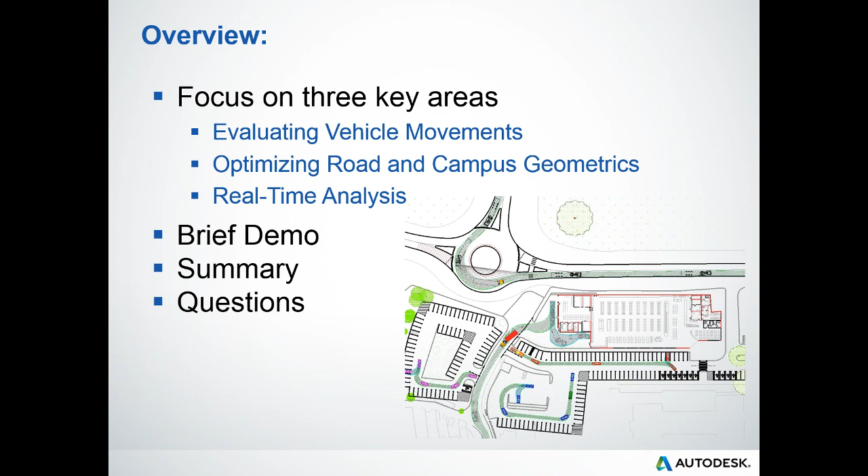My goals for our session: I want to give you some exposure to the Autodesk Vehicle Tracking Solution, as well as review a subset of its capabilities. I say subset because it would take much longer than our 30 minutes to review all of its functionality. Instead, we will focus on several primary features, and we will do it through the lens of its business benefit. In other words, how specifically does Autodesk Vehicle Tracking improve the planning and design process? Finally, I want to ensure that we address any questions you have about our solution. So with that, let's go ahead and get started.

We begin with a project where, like most projects, we need to evaluate if our geometrics can support a service vehicle. In this case, it's a standard school bus. Essentially, we need to confirm if a school bus can successfully maneuver from the southwest through our project, exiting at the northeast. Using Autodesk Vehicle Tracking, we can determine this very quickly.

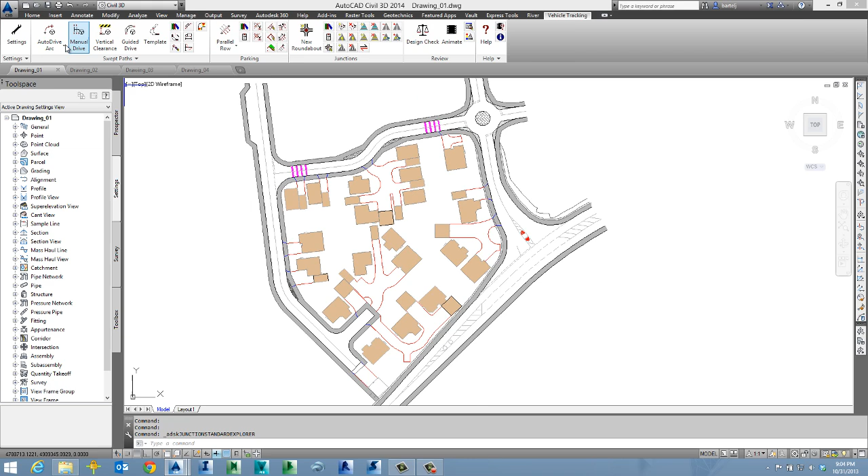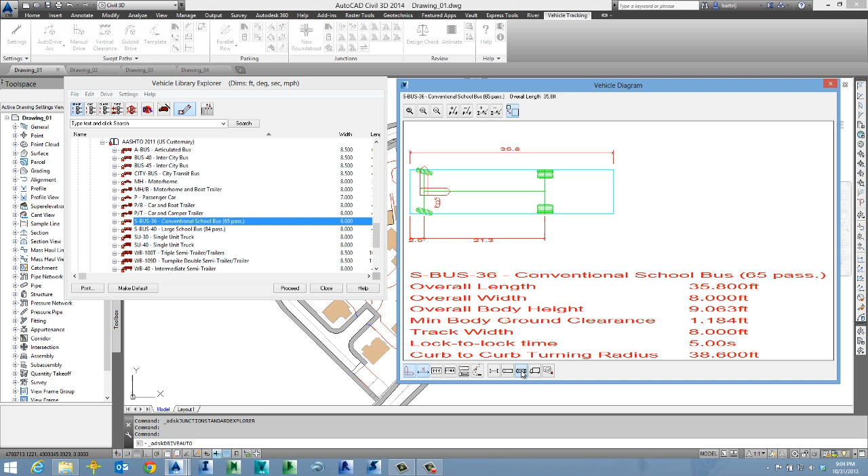First, we will start by selecting Auto Drive and then choosing the appropriate design vehicle. As we do this, I would like to point out the extensive vehicle library that ships with the solution. It contains design vehicle definitions and types from across the globe, numbering well over 1,000 vehicles. For our project, I will select the standard 65-passenger school bus from the U.S. AASHTO Design Library. Once selected, we can use the vehicle diagram to see specific information about the selected vehicle, including dimensions, as well as a chassis view and profile view.

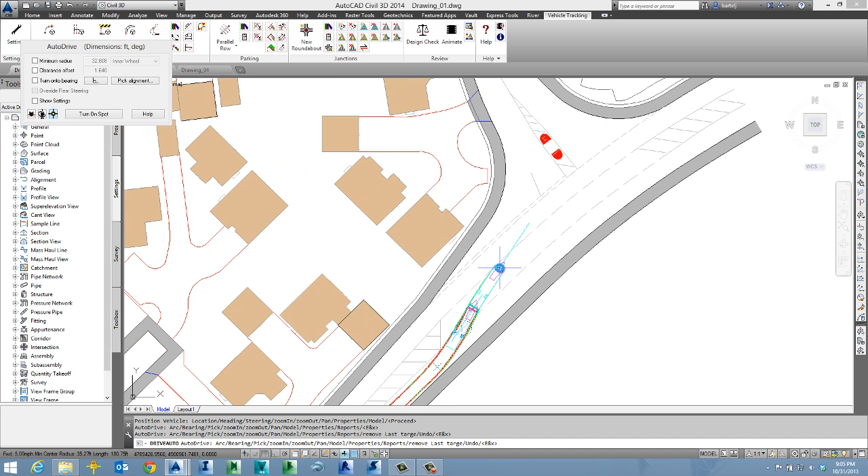From there, we will proceed by simply clicking points within our project roadway and literally drive the route we would like to evaluate. As we pick points, you will notice a green and red envelope being constructed. The green outline indicates the envelope created by the vehicle body, and the red outline indicates the envelope created by the chassis. Using this outline, we get immediate feedback as to the horizontal space required to maneuver our vehicle. As we enter the roundabout, maneuvering is a little more challenging, so I'll pick my points a little closer together.

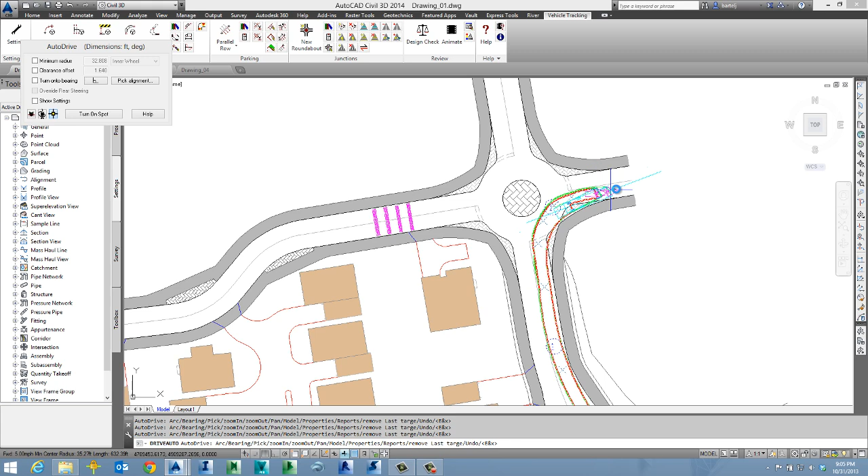When finished, a number of intelligent grips are displayed. Using these grips, we can easily edit or refine our vehicle path. As we make changes, the results are dynamically displayed. And if we make an adjustment that results in a maneuver that our vehicle can't physically do, we get immediate feedback in that the envelopes terminate at that point.

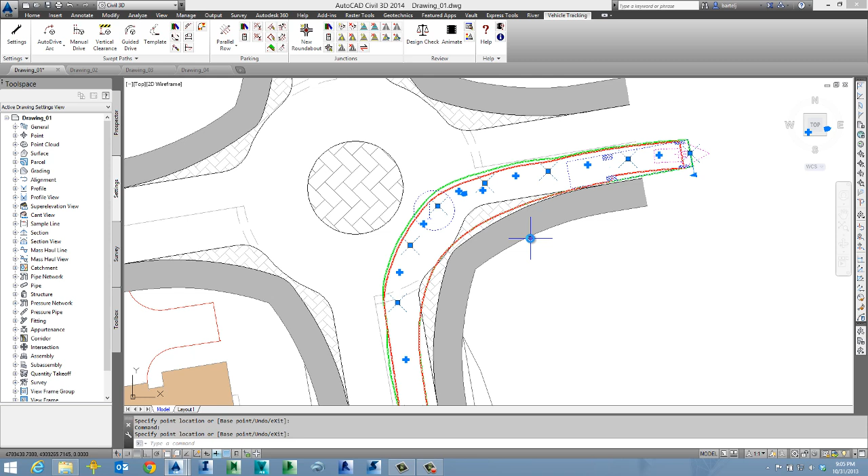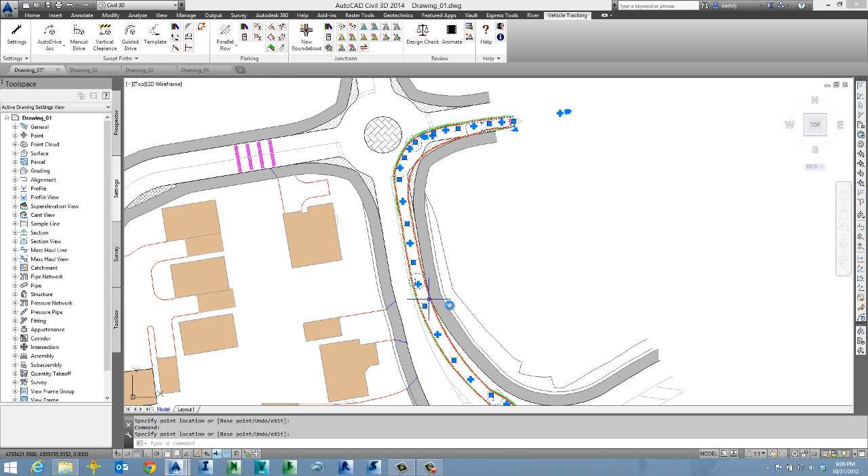Now for our project, the resulting swept path analysis shows that a bus can make the corner so long as the brick area is a surface designed to be driven over. To complete this process, we would go back and review the entire path and make any revisions as necessary. By using the intelligent grips, these revisions could involve adjusting or creating target points. With our swept path analysis complete, we have confirmed that it works horizontally, but there's more that should be considered.

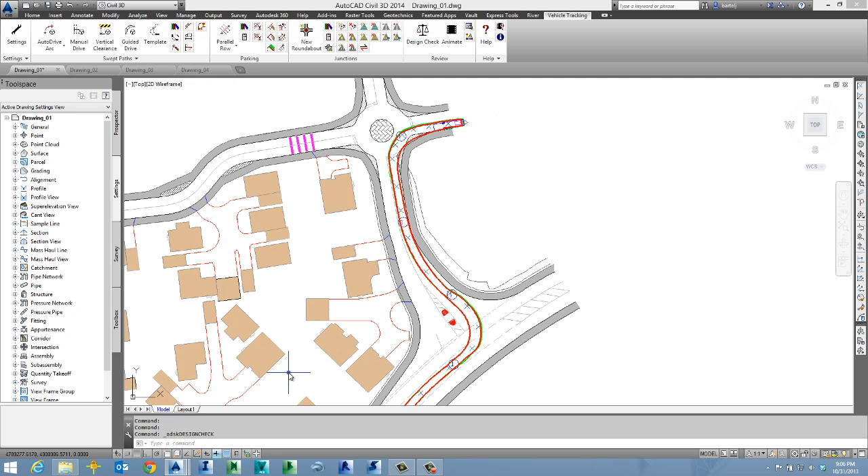By performing a design check, we can evaluate our vehicle path against a number of rules-based constraints. In our case, the results show that we have a severe steering warning, which indicates that our maneuver requires a steering angle that's in excess of what is permissible. For further detail regarding steering, we can easily create a graph within our model.

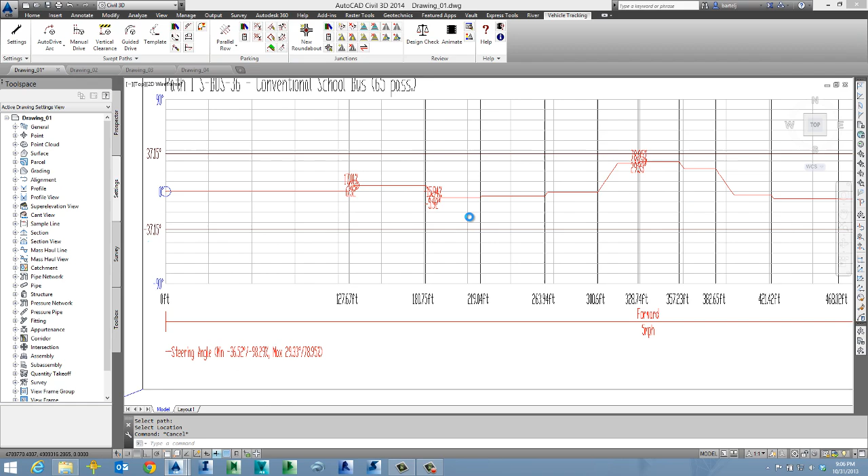Once created, Autodesk Vehicle Tracking displays steering limits as well as the steering angle throughout our swept path analysis. Looking here to the right, we can see the area where we exceed what is currently permissible, and that coincides with our maneuver through the roundabout.

Using Autodesk Vehicle Tracking, we are able to quickly and easily determine if our design can accommodate vehicle movement, as well as confirm if that movement complies with rules-based constraints.

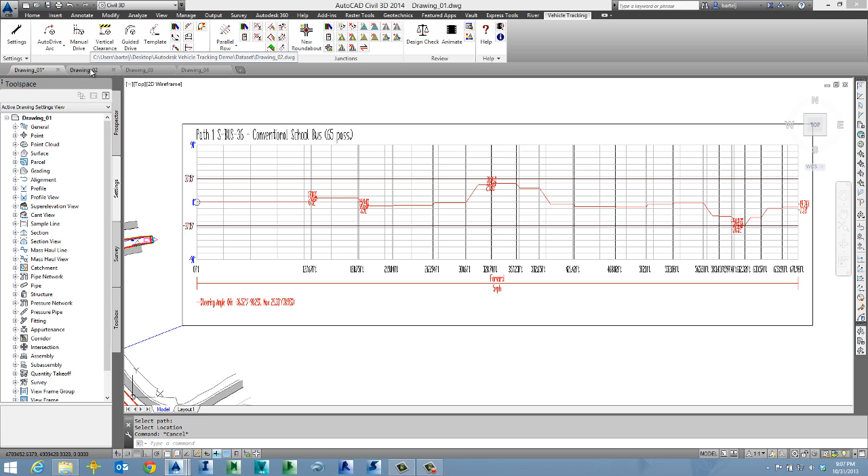Now, because vehicle movement will also involve negotiating a site, let's take a look at another example. In this situation, we want to confirm that our design is such that a 30-foot rigid delivery truck can successfully access the loading area of this commercial facility.

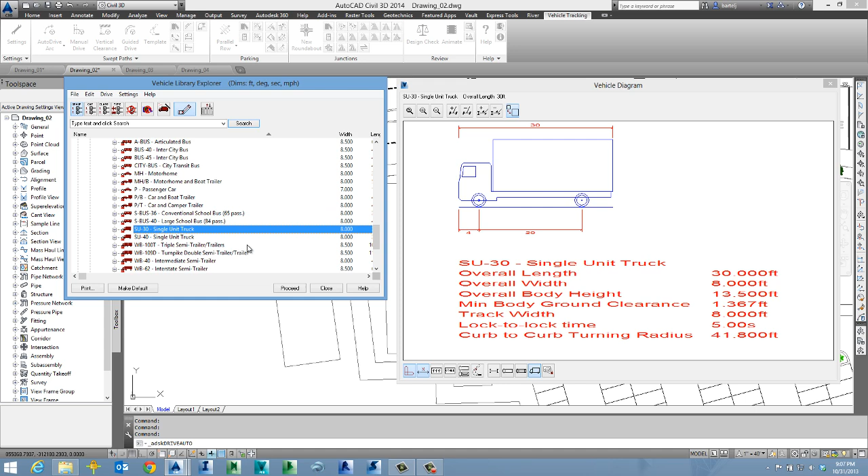Like our last example, we will begin by selecting Auto Drive and then choosing the SU30 design vehicle. However, this time, rather than picking each target point to drive through within our design, we'll let the system compute some of the path for us.

We can accomplish this by starting our swept path and then choosing an alignment to control our turns. The first alignment entity we choose will be the entrance centerline stripe. We will then select the edge of pavement parallel to the building, and we will finish by choosing the pavement edge near the loading bay.

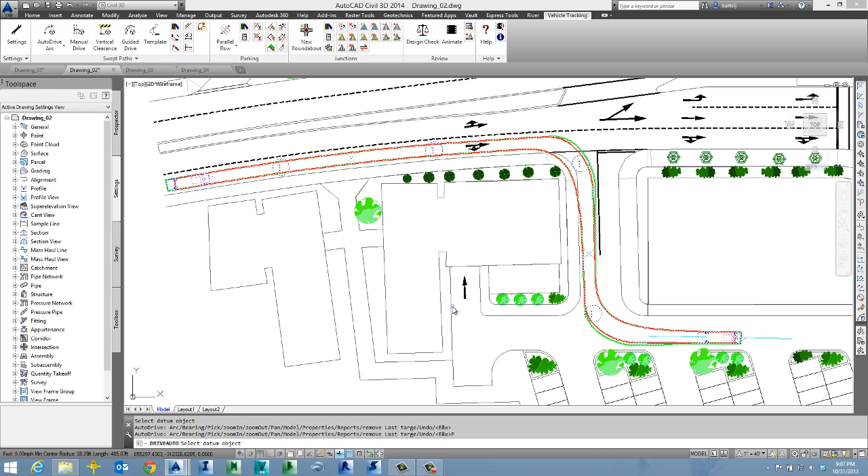In literally 4 clicks, we were able to accurately complete our analysis.

Like our prior example, we can now use intelligent grips to refine our swept path analysis if necessary. Within the parking area we seem to be okay, but if we check the drive entrance, we see that the tires of our truck will leave the roadway.

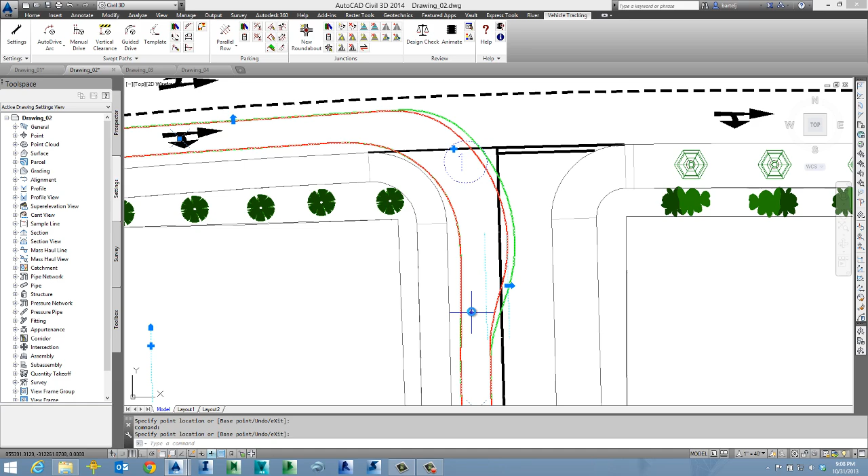Now in the real world, a driver could resolve this by performing a steering overrun, and by clicking the arrow grip, we can simulate this maneuver. When complete, our conflict is resolved.

As I back up, our swept path provides an excellent exhibit to convey the vehicle movement to a stakeholder. Having said this, many times a 2D representation is hard for folks to visualize.

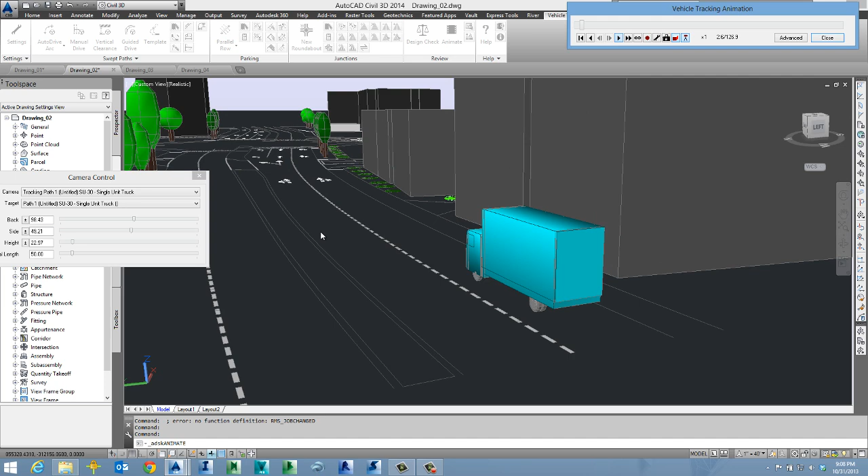To make our presentation more lifelike, we can quickly create an animation. Once created, simple VCR-style buttons allow us to experience our vehicle movements in 3D.

While the animation plays back, we can adjust one of several slider bars to control our proximity to the vehicle as well as our point of view.

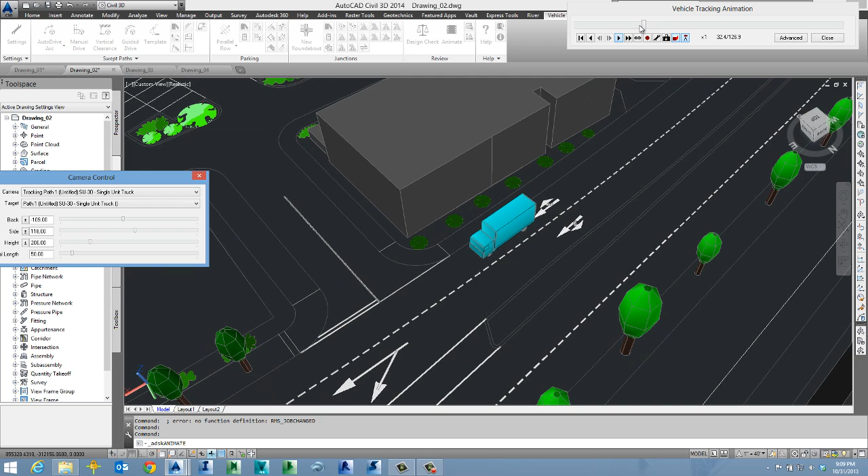As our SU30 rigid delivery truck turns and enters the drive, we can easily see the effects of the overturn maneuver we assigned in our swept path analysis.

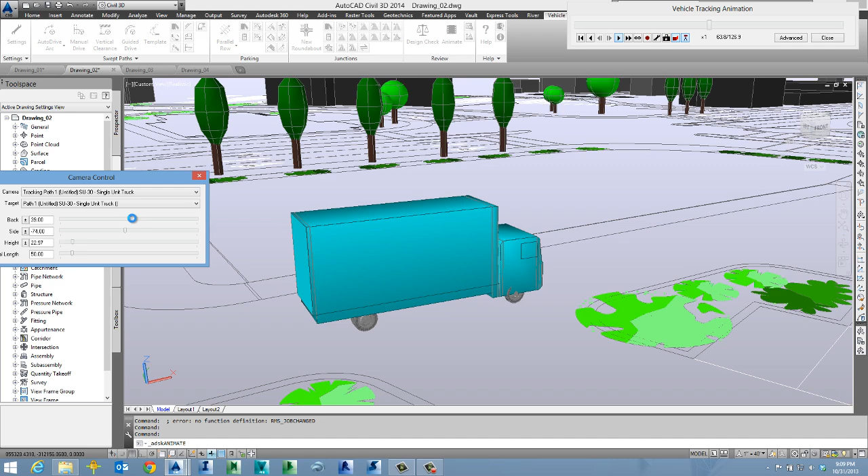With a single click, we can adjust our display to that of the driver's view, and then back to a fixed position camera. The visualization tools within Autodesk Vehicle Tracking provide a means to analyze and present our vehicle maneuvers from any vantage point our project requires, even if that includes the driver's side mirrors.

Using the side mirror viewing option, we can experience exactly what the driver will as they reverse into the facility's loading bay.

Whether it's a 3D visualization or a 2D exhibit, Autodesk Vehicle Tracking provides the tools necessary to create both very quickly, giving you the flexibility to leverage whichever best meets your project needs.

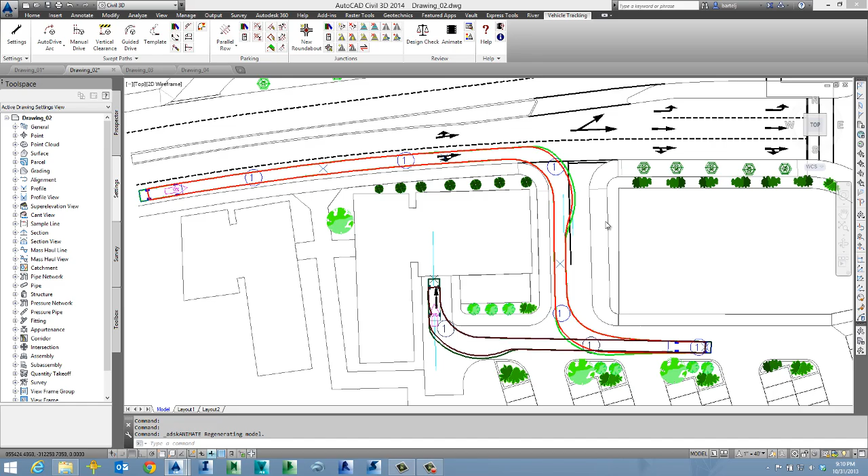Let's switch gears for a moment and talk next about parking lot layout. As we move to the east, we see a large parking area in need of striping.

Now when striping a lot, we want to maximize the number of parking stalls while still maintaining something that is operationally functional. In other words, we can't get crazy.

Now laying these out was something I used to do a lot of, and it was an exercise in both art and science. Ultimately, I needed to optimize the layout as well as maintain a geometric standard with respect to stall width, driving aisles, and handicapped spaces.

Unfortunately, most lots were usually a unique shape, and the process of figuring out what works best was a time-consuming and tedious process. For example, if I were to ask what is the best striping configuration for this particular lot to net the most usable parking stalls, how long would figuring something like that out take?

Fortunately, using our solution, we can figure that out pretty quickly. We will begin by selecting a parking standard, and like the vehicle library, we have a number to choose from. For our project, I will choose a US standard, but from a standards library I made myself.

Let me explain. In our world, trees are green, fire hydrants are red, and unfortunately, parking stripes are yellow or white, neither of which shows up well with the light background I'm currently working with. Because of this, I copied the US standard and changed the stripe color value from yellow to orange.

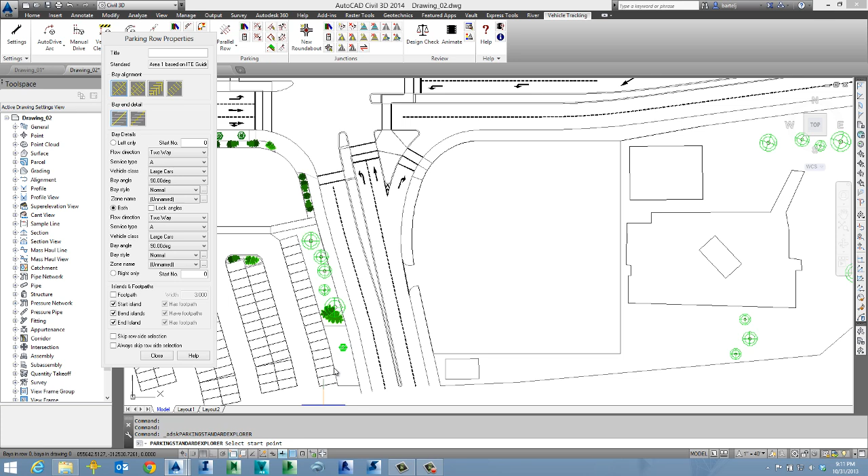And once again, in my case, I altered the US standard and added LB to the end for light background. After confirming my choice, I can begin to lay out my parking bays. I'll start by traversing around the entire perimeter of the lot, clicking on the endpoints of each segment, whether those be lines or curves.

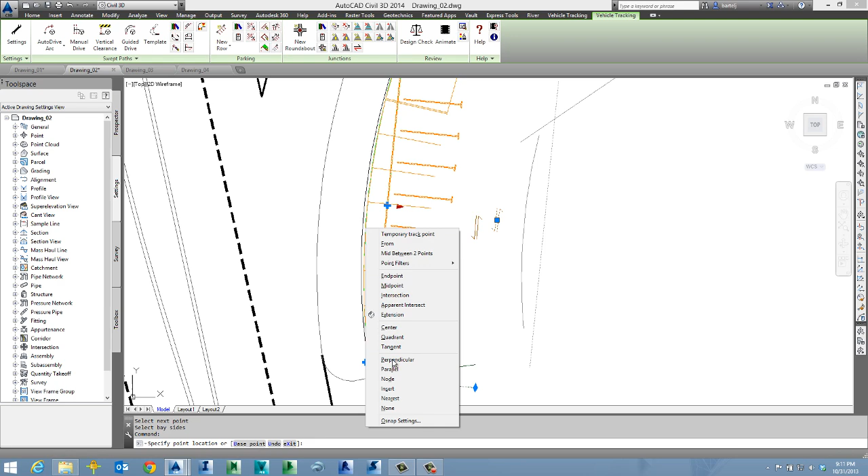Once finished, I will click to the inside to confirm I only want stripes on the interior of what I defined. I will then use the intelligent grips to convert the line segments to arcs where appropriate. Notice as I make my changes, the parking stalls dynamically update while at the same time staying within the rules-based constraints of my US parking standard.

Next, we will fill in the interior area of our lot by leveraging the parallel option. Essentially, this tool will create parking bays parallel to what was already constructed, while maintaining the driving lane widths. When finished, I get a solution, but in this case the irregular perimeter is such that perhaps I'll be better off filling the interior a different way.

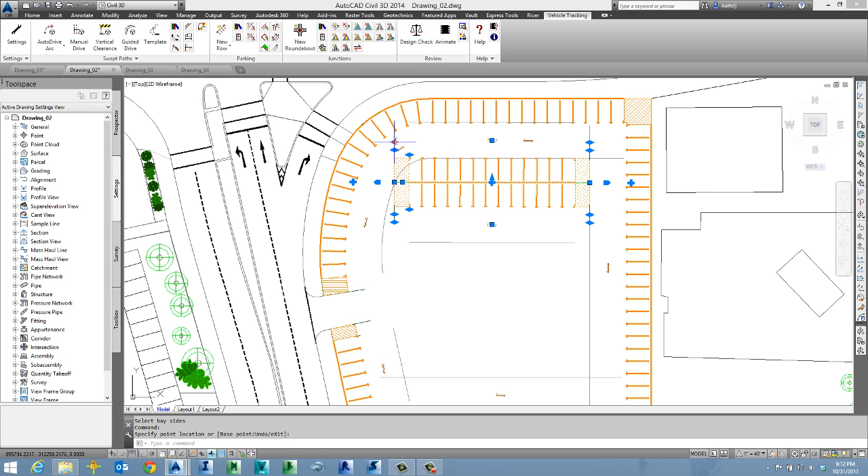Using a standard AutoCAD erase command, I'll remove what was constructed and experiment with laying out a new row parallel to the north edge of my lot. Once created, I will use the intelligent grips to quickly alter my new parking rows configuration to meet the area I have to work with. Using the grips, we can extend or shorten the row, as well as change the geometrics of the end bays.

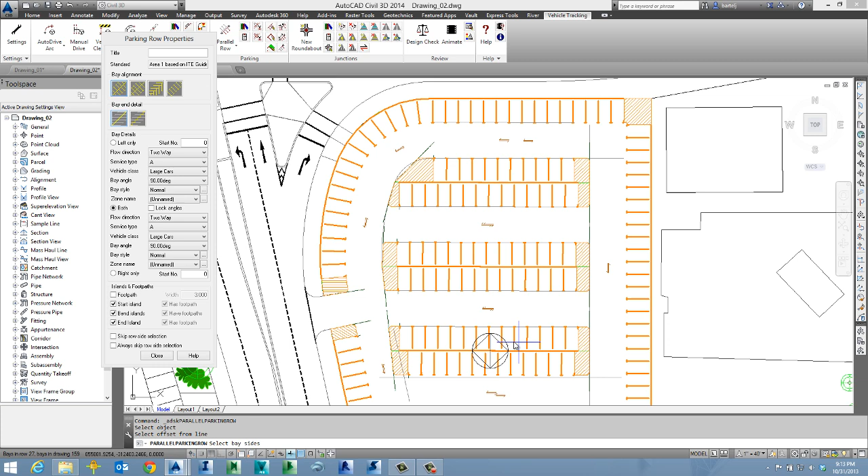Once the first one is set, I will return to the parallel option to create the next parking row. I will then alter this one much the same way as I did the previous one, and then repeat the process once more to create the third and final row. As I do this, it is important to note the speed with which I can experiment with different configurations. This can absolutely save a ton of time in coming up with the best overall solution.

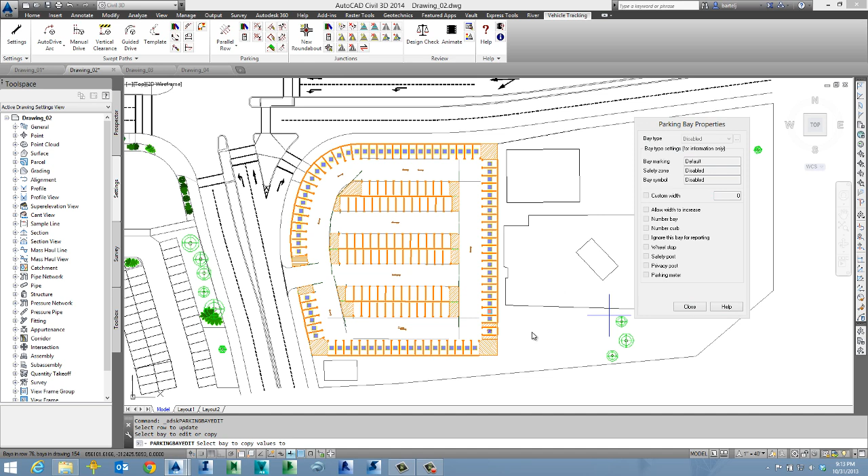With my parking rows established, I'll need to start considering the location of handicapped spaces. I think I'll start by converting some of the bays in the southeast corner near the building entrance. Now, using my tool, it's a simple point and click operation to make the change. Notice as the stalls are changed from standard to disabled, the geometry continues to update dynamically, and more importantly, it remains consistent with my selected design standard.

We'll go ahead and add just a couple more, and then we'll see where we are overall by generating a parking report. Clicking on the report tool displays an instant tally of our parking layout. Looking at the numbers, we have 152 total stalls, 8 of them being handicapped spaces, which represent a little more than 5% of the total.

If we would like to further optimize our layout, we can start to adjust things like parking angle. For example, let's convert the parking stalls along the entrance aisle to be 45 degrees and matching the driving direction. Doing this will reduce our total number of stalls, but will make the parking row narrower, which can in some cases provide more space in a tight area.

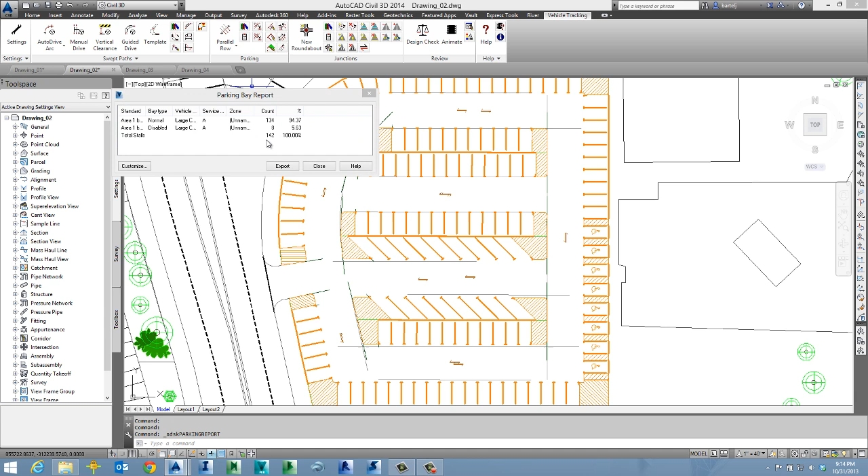Once again, as we make changes to our layout, we see the dynamic nature of the objects, as well as the continued adherence to our design standards. With the angles altered, let's check and see what impact it has on the overall number. Looking at the report, making our change nets us 10 fewer parking stalls.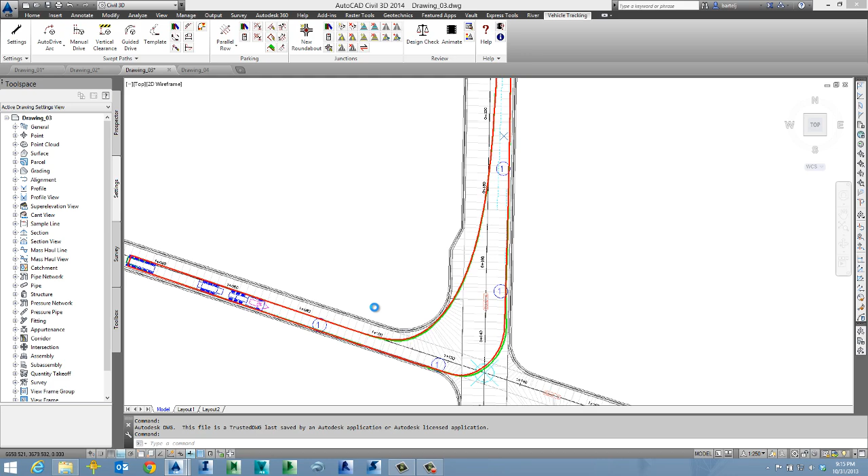So to answer our question from earlier, Autodesk Vehicle Tracking takes the tedious and time-consuming task of parking lot layout and turns it into something that is quick and easy. Now so far, everything we've looked at has been from a horizontal layout perspective. In our next example, let's see how we can incorporate elevation into our analysis.

In this design scenario, we have a Civil 3D corridor model, and we want to confirm that this very large vehicle can negotiate the intersection successfully from west to north. We've already created a swept path, and at first glance it seems to work. I say seems because in our 2D top view, we are only seeing the horizontal solution.

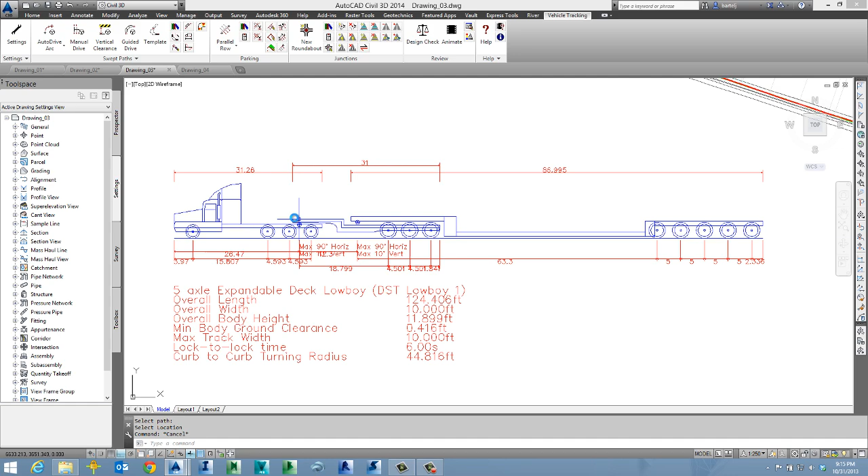Let's look further at how well this design works vertically. We will begin by examining our design vehicle, creating a quick profile of the truck used in this scenario. As we review the profile, we can see several important things. First, the ground clearance at the lowest point of the vehicle is less than 6 inches. Next, the vehicle has 2 articulating points at which it will pivot.

Now, as we look at our swept path, we can easily see the envelope of the truck chassis and truck body. But it would be really helpful to see more detail about how specifically this truck with 2 pivot points will make the corner. To accomplish this, we will create additional truck symbology along our swept path to make the vehicle maneuver easier to understand.

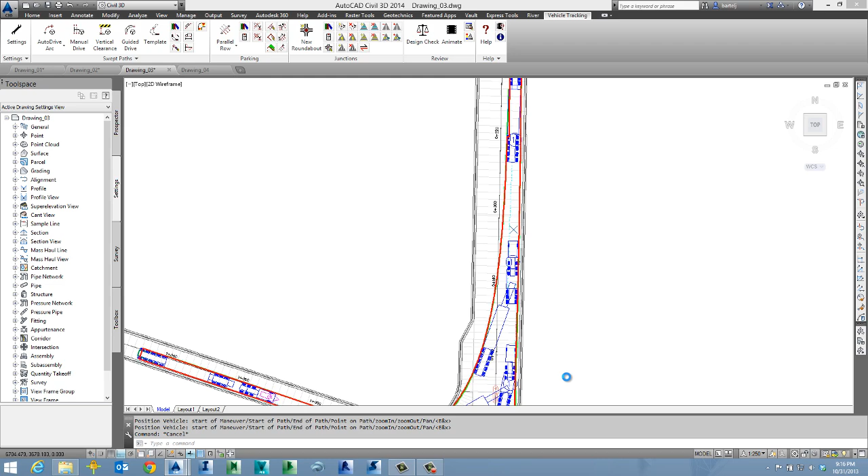When finished, an important thing becomes evident. As we review the truck symbols, the lowest part of the trailer is directly over the crown of the road, while at the same time the tires are at the lowest area of the pavement. Because of this, there is a possibility our truck will make contact with the roadway surface.

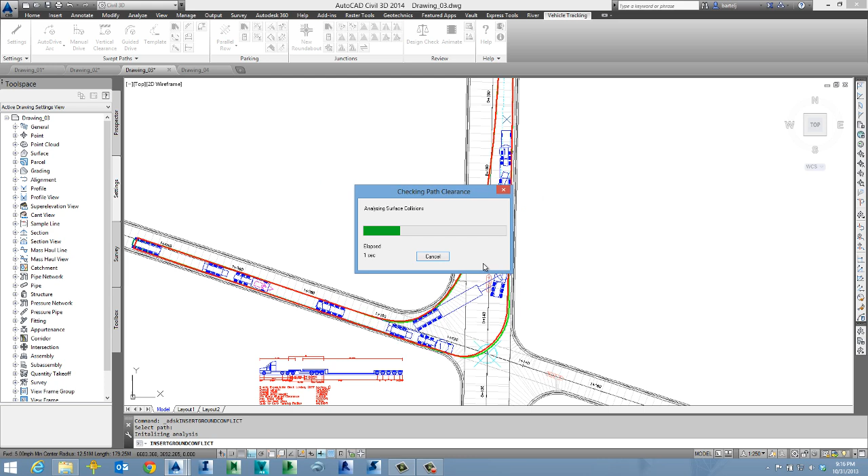To determine if we have a problem or not, we can quickly run a ground conflict report. Running the report will compare our design vehicle elevation to the elevation of the Civil 3D roadway surface. When finished, we'll see our results displayed in our swept path. As we zoom in closer, we can see where and to what extent our vehicle will impact the crown of the roadway.

Using the information Autodesk Vehicle Tracking provides, we are in a better position to make the design decisions necessary to resolve this situation.

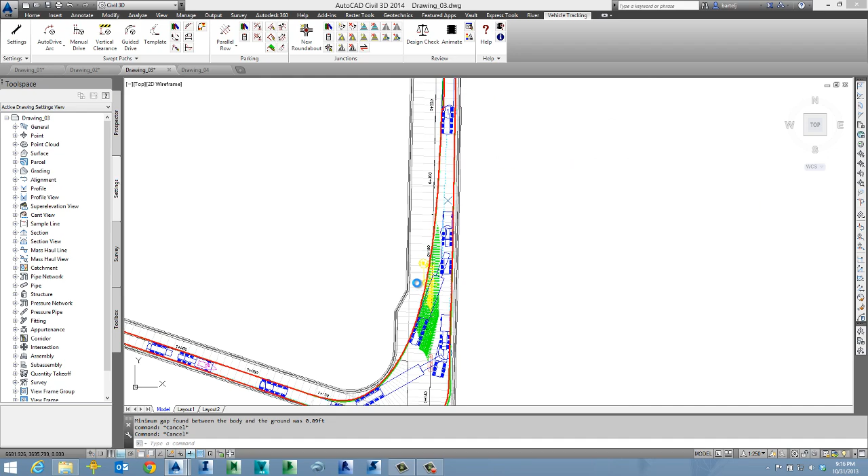Now, before we conclude with this example, it's important to note that Autodesk Vehicle Tracking has the unique ability to interact with the native Civil 3D objects directly. In other words, none of your time is wasted performing conversions every time you want to run your analysis. Instead, you can focus on your design where your time is better spent.

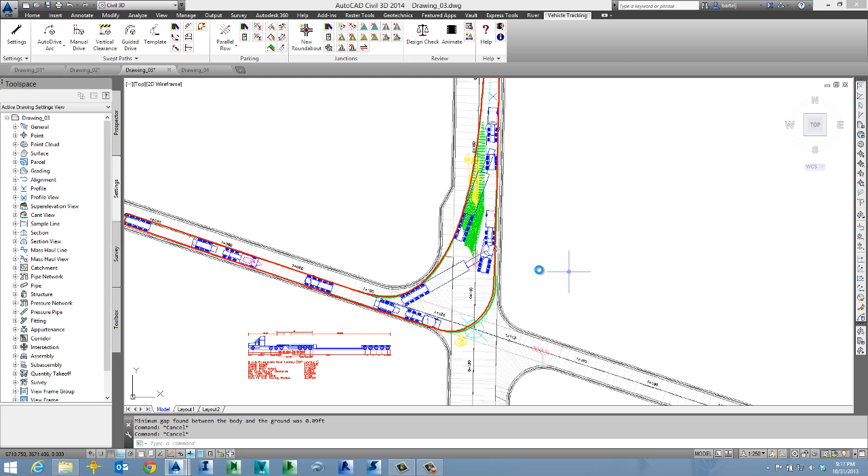In our final example, we'll see that our solution not only interacts with Civil 3D objects, but can also create them as required. In this scenario, we will use Autodesk Vehicle Tracking to perform the preliminary layout of a roundabout.

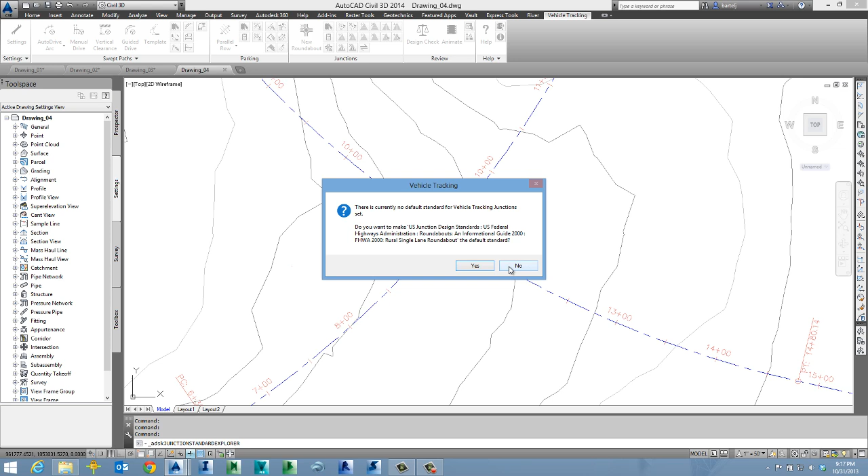We will begin by choosing the appropriate design standard. For our project, I will select the US FHWA Rural Single Lane Roundabout Standard. I will then verify that my defaults are OK and set my display consistent for use with a light background. Next, I will place my ICD and begin to assign my approach roadways.

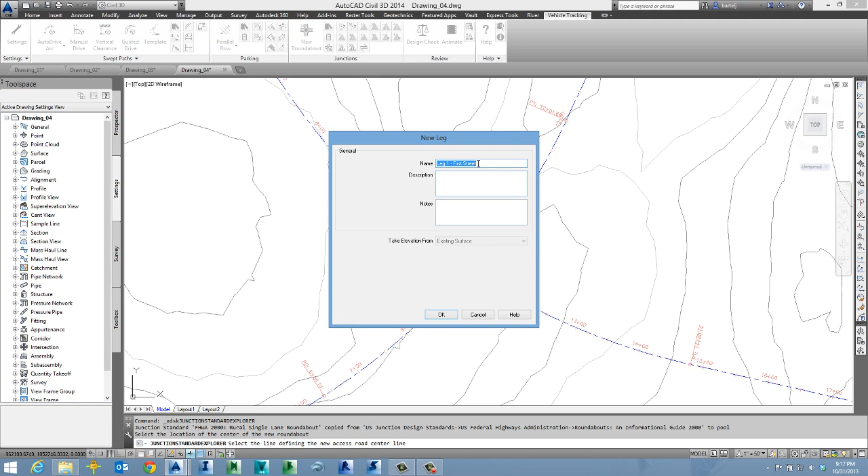You will notice as I select each approach roadway, my chosen design standard is used to create all of the necessary geometry. Now, I don't know if you've ever created roundabout geometrics before, but if you have, I'm sure you can see immediately how powerful this tool is.

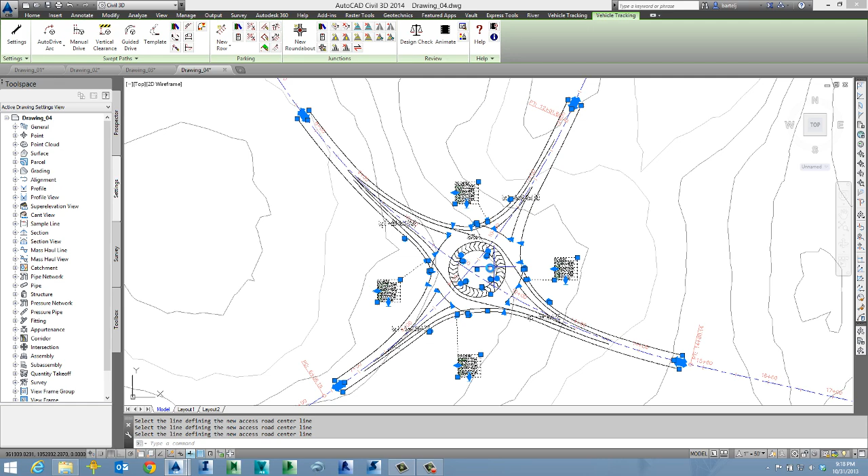Once finished, a series of intelligent grips are displayed. Using these grips, I can further refine my roundabout geometrics. For example, I can move the center point and all of my geometry dynamically updates.

Now, in addition to the updates, we also receive real-time design feedback. Looking at the table, we can see things like fastest path information as well as performance data for each leg of the roundabout. This real-time design feedback is a powerful tool when exploring different design alternatives.

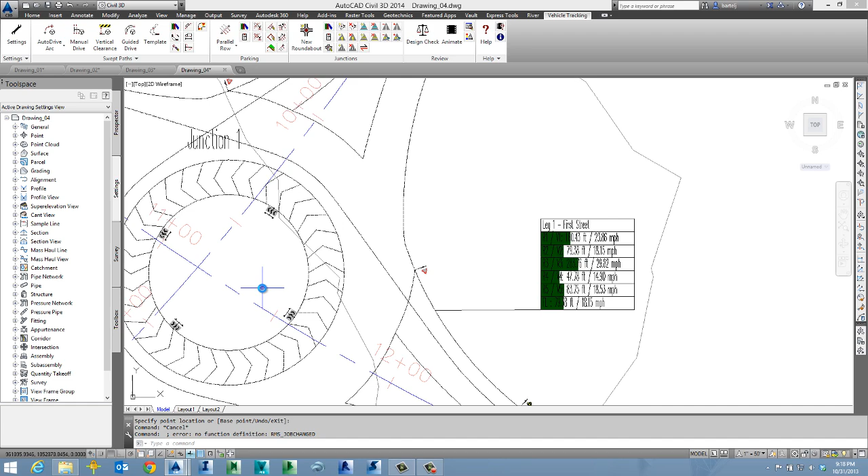Looking at some of the other intelligent grips available, I can make changes to things like the offset of my center line. So we'll make some changes to that. We notice we see a dimension as well as real-time feedback. I can come down and change my splitter width. I could come over and change the angle or my near side radius. As each one of these changes, all of the geometry dynamically updates accordingly.

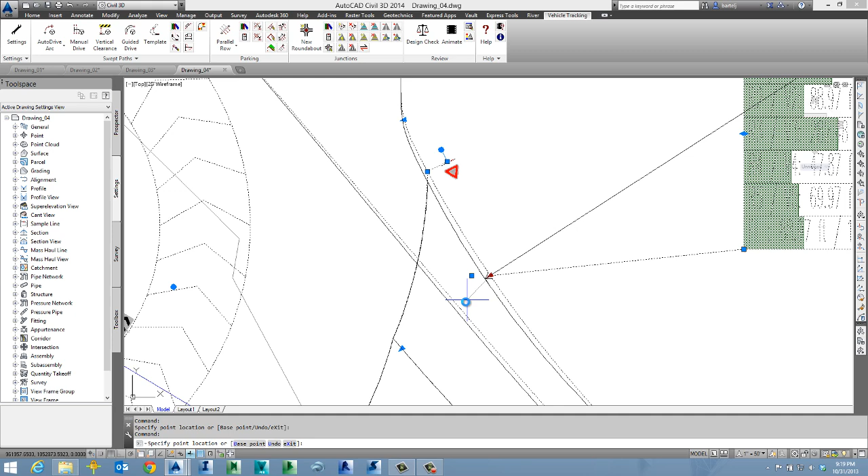Not only the geometry, but you also see that signage is automatically placed in the appropriate location. Notice as I bring the edge of my radius back that my yield sign location is automatically relocated.

When I'm ready to make more specific changes to my roundabout geometry, I can use the Edit Roundabout dialog. Once launched, we'll see all the parameters that make up my roundabout. In this case I can look at leg 1, and if we start by looking at the approach, I can see all the values I can adjust very specifically. If I select a particular value, you see in the diagram on the right a glyph showing exactly the area that dimension will affect.

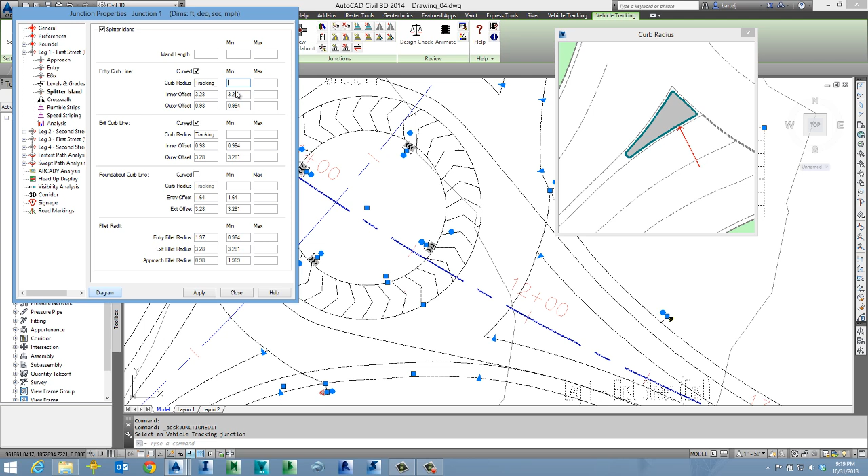So if we'd like to add a splitter island to our roundabout, I can adjust the values. In this case, we'll leave them at the default. We'll click apply and our splitter island is created.

Now, if we'd like to add some other features, I can do it through some of the buttons that exist within the ribbon. In this case, we can add a crosswalk, and I'll have you take note of the signage. We place our crosswalk roughly 20 foot back from the radius line, and you'll see that the system was smart enough to dynamically move back the roundabout signage and automatically incorporate the appropriate signage for that at its appropriate location based on our design standard.

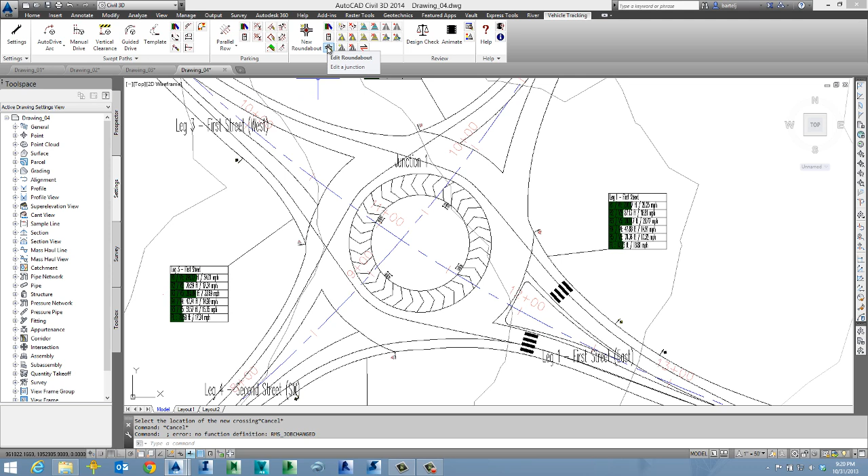When I'm satisfied with all my geometrics, I can move to the next step where I will use my results to automatically construct a Civil 3D corridor. We can accomplish the entire corridor construction with literally only a couple of clicks.

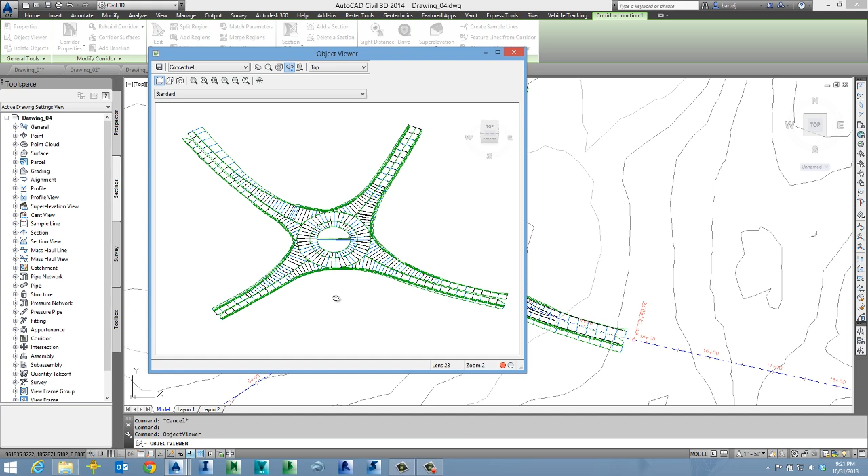As our corridor displays, think for a moment about what we've just accomplished. In less than a handful of minutes, we've not only laid out preliminary geometry that conforms to rules-based design criteria, but we're also in a position to begin modeling the results in Civil 3D. This is a very powerful tool that can assist you in exploring numerous design alternatives in order to find your client the best solution possible.

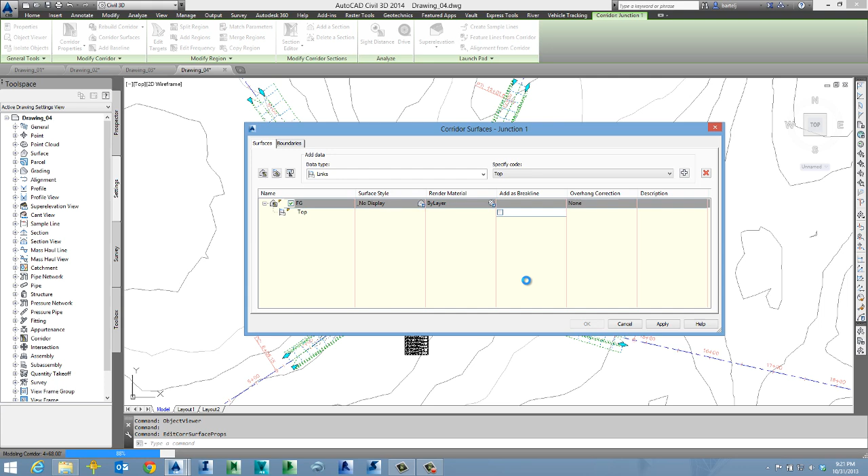We will conclude this scenario with some quick visualization. We'll start by using standard Civil 3D commands to construct a finished ground surface for our roundabout corridor model. We will use this surface to project or assign elevations to our roundabout components. This includes our signage and some of our symbology.

With our surface created, we will then alter our drawing settings such that our vehicle swept paths will automatically use the elevations from the corridor surface.

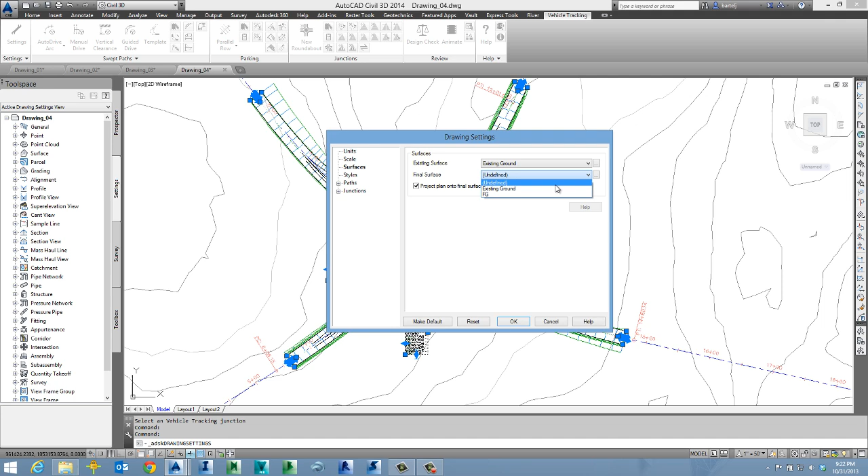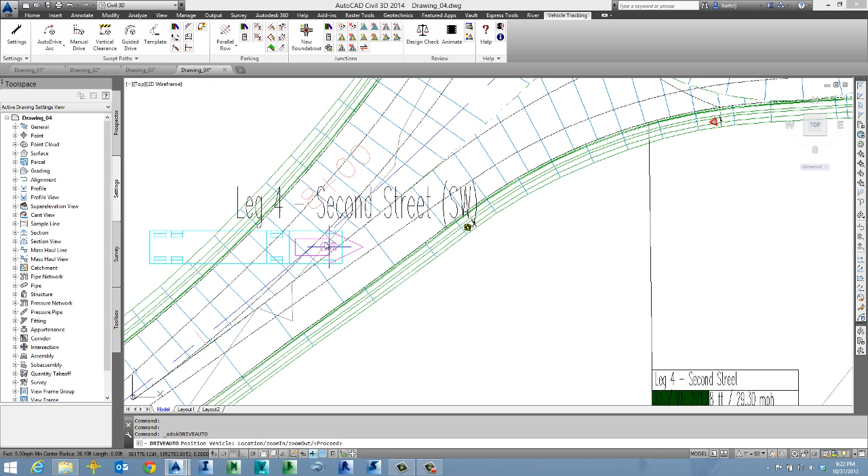Finally, we will create a couple of swept path analysis envelopes. For the first path, I will select a WB40 design vehicle, or essentially a semi-truck, and set it up to move through our roundabout. As we place our vehicle, notice how it intelligently locks onto the roundabout geometry. It automatically knows the path alignment as well as the driving direction.

In this case, I would like to see how my design vehicle works moving through the roundabout and exiting to the northwest. I need only click the start and end point, and Autodesk Vehicle Tracking automatically computes the rest.

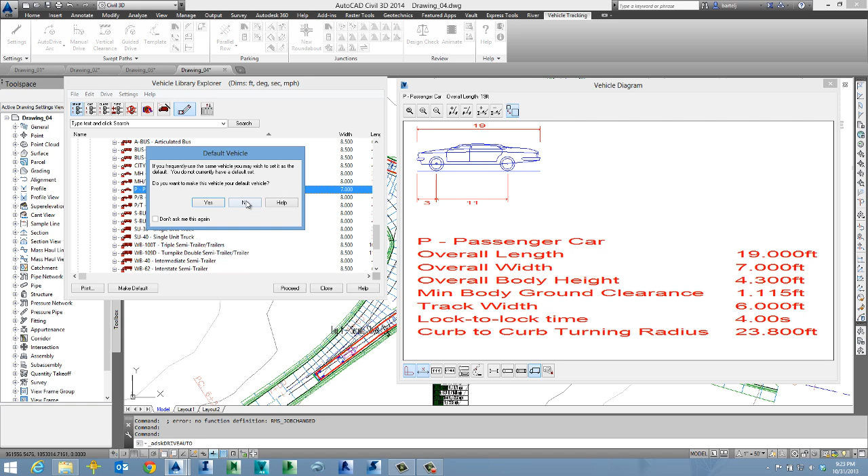Next, let's perform a similar operation using a standard passenger vehicle coming from the opposite direction, this time exiting the roundabout to the southeast. Once again, it automatically and intelligently locks onto my roundabout geometry, and within 2 picks, the software solution determines the remaining path for me.

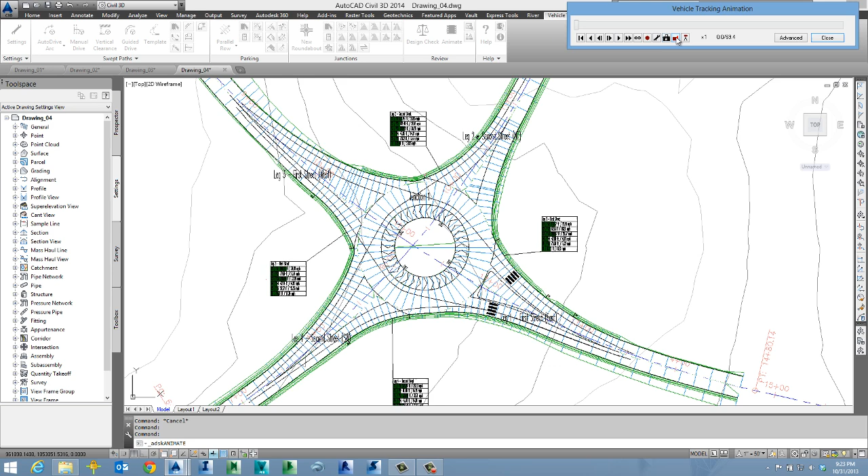With that complete, let's go ahead and create a quick animation. As the animation plays back, we can adjust our display between the views of both the truck and the car. I can also see a little bit of bounce as they move down the road.

I intentionally did not do anything to further refine my corridor surface so that I could show you that the vehicles are in fact driving along the native Civil 3D geometry.

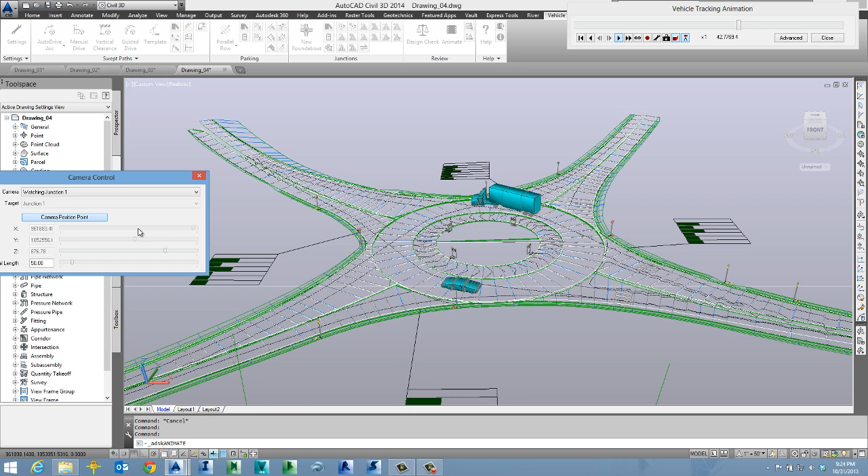So to summarize, what is Autodesk Vehicle Tracking? Well, it's a comprehensive transportation analysis and design solution for vehicle swept path analysis. During our demonstration, we used it to take a look at several ways to determine vehicle movement, both forward and reverse, using manual as well as semi-automatic tools.

We also reviewed parking tools and how these can be used to expedite the process of parking lot layout. In every case, whether it was dealing with vehicles, parking lot tools, or roundabout layout, Autodesk Vehicle Tracking supported numerous rules-based design criteria and standard libraries. We also saw that these libraries are user-definable to support essentially any design standard.

We also witnessed numerous forms of real-time analysis, including design checks, a steering report, ground clearance report, parking lot count, roundabout heads-up design, visualization, and more.

As for the business benefit, Autodesk Vehicle Tracking is a solution that's easy to use, intuitive, and extremely powerful. It's also designed to work within a familiar AutoCAD environment. Its numerous features can help you speed the planning and design processes, as well as more quickly evaluate design alternatives, such that you can present your client the best design solution possible.